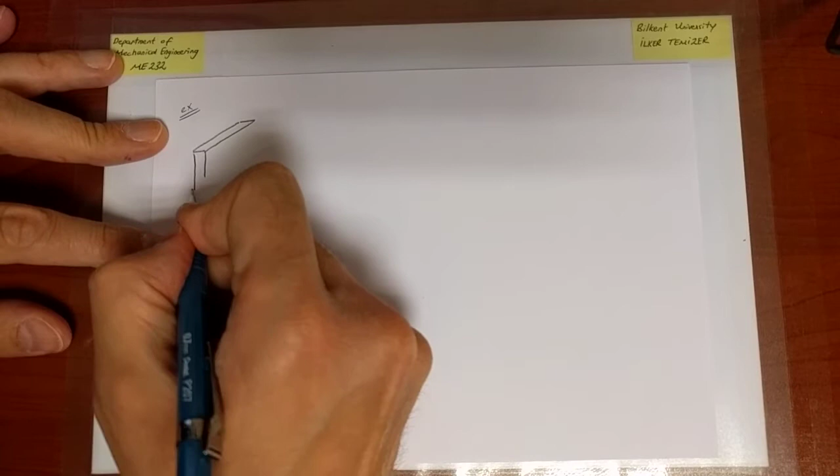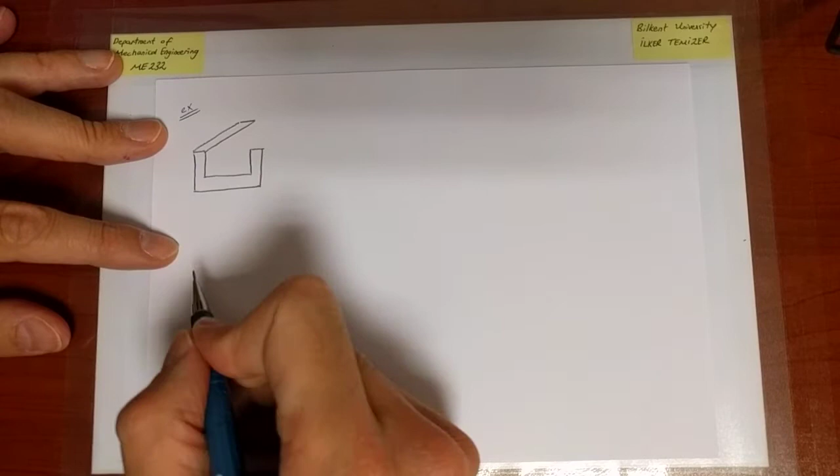So what I'm trying to do here is draw a block which will serve as a containment for the deformation of another material. So that's our block, okay? And within that block will rest yet another one. Like this, okay? All right, good.

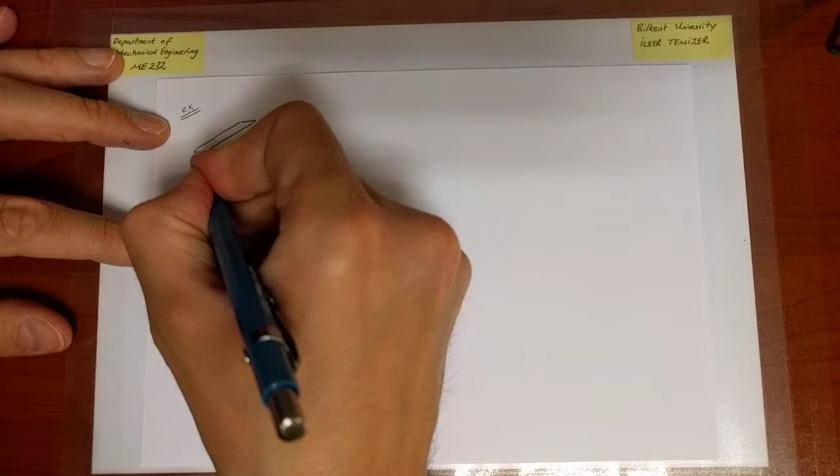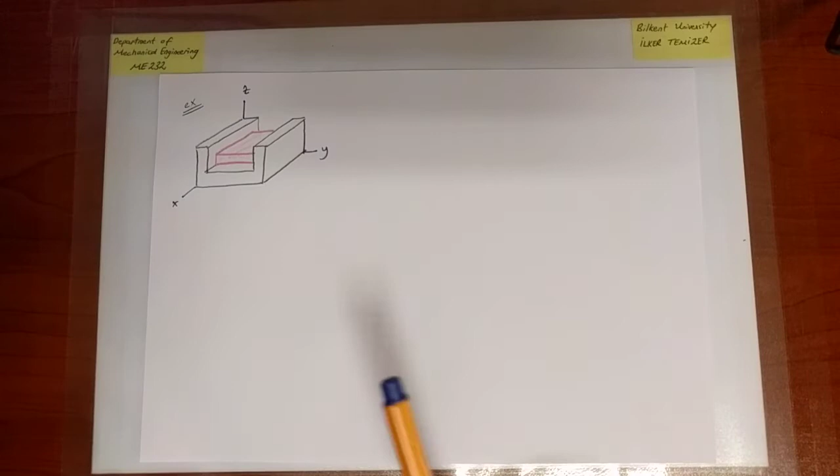So now, before I forget, let me also assign some coordinates here. This is x, that is y, and that is z. So I like to motivate this simple example first. And that motivation comes from a simple manufacturing operation associated with presses forming things out of sheet metal.

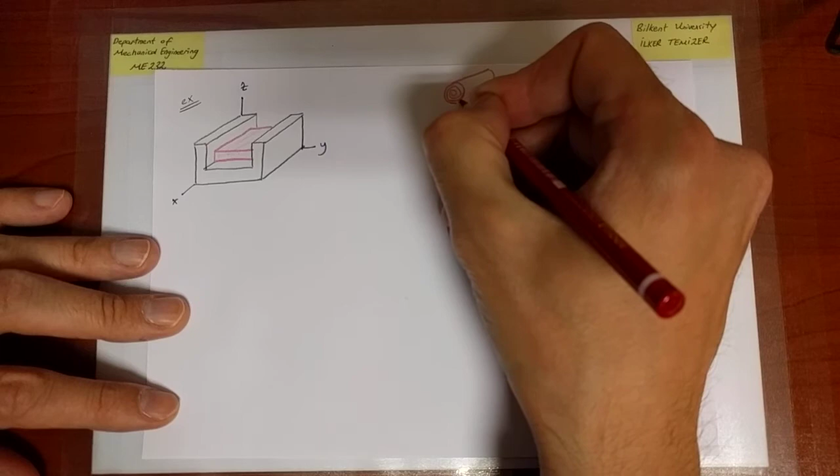So eventually when you do your training, you might see that into, say, a car factory gets delivered sheets of metal. These are pretty huge sheets. They're not small. They could have a diameter of 1 meter, and they could be more than 1 meter in length, several meters in length, and it's an aluminum sheet of a certain thickness, several millimeters. So you could unroll this sheet and from that extract a sheet of a certain thickness.

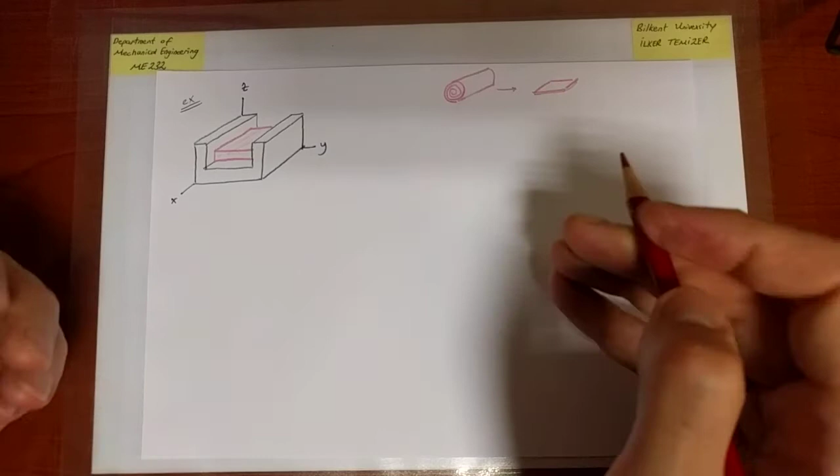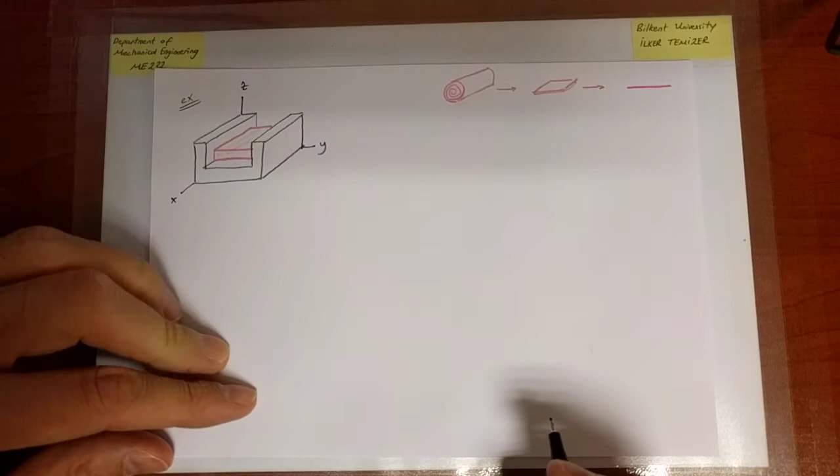Okay. And what you'd like to do now is take this sheet and form ultimately, say, the shape of a car door, from which you can do some more manufacturing operations and eventually manufacture the car door and use it in assembly. So we're going to take this sheet and form it into the shape of a car door. And the way to do that is to use a die that has the shape of a car door, or that shape is contained within the die. And this die will have a negative image located on a press. Okay, so that's also a part of your die.

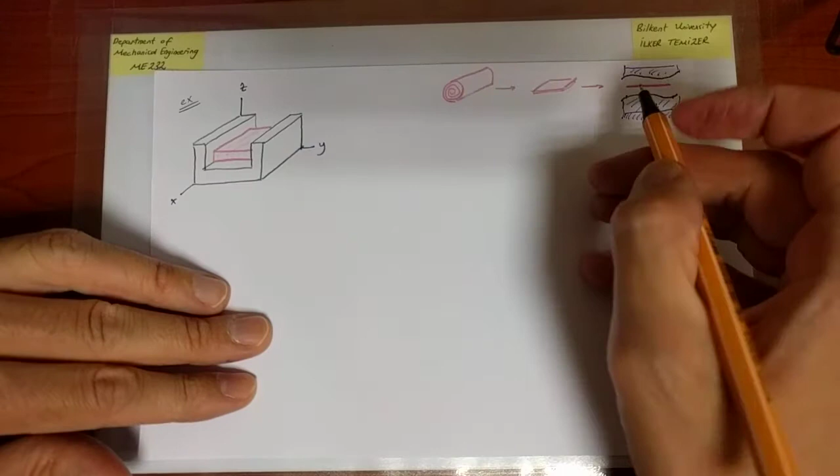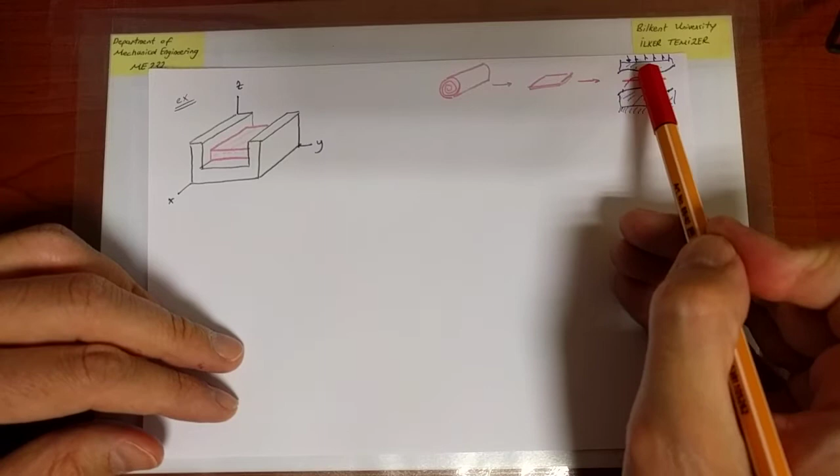And there is a huge press here because these are metals that are hard to shape. They require enormous forces. So this huge press will eventually take, so let's say the lower portion is fixed. The press will come and close up on the sheet of metal you have and apply a stress of certain magnitude, and eventually when the press closes and opens up, this initially flat sheet will have taken the shape of the car door according to the shape of the die. Okay, so we have a sheet metal and we apply compressive stresses on it, and eventually you have the portion of the car door forming.

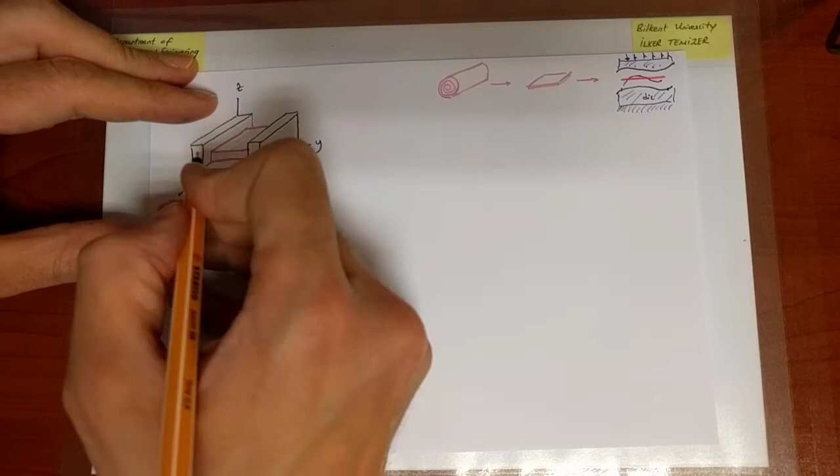Now in this process, obviously what we would like to have is the sheet metal deforming into the shape of the die surface and not the die becoming flat due to the pressure that is applied. So we don't want the die to deform, and you manufacture and design the die itself in that way. The whole process rests on that. So ultimately we're going to omit the deformations of the die because we're not interested in it and it shouldn't be significant. And so we will in fact idealize the die as being rigid.

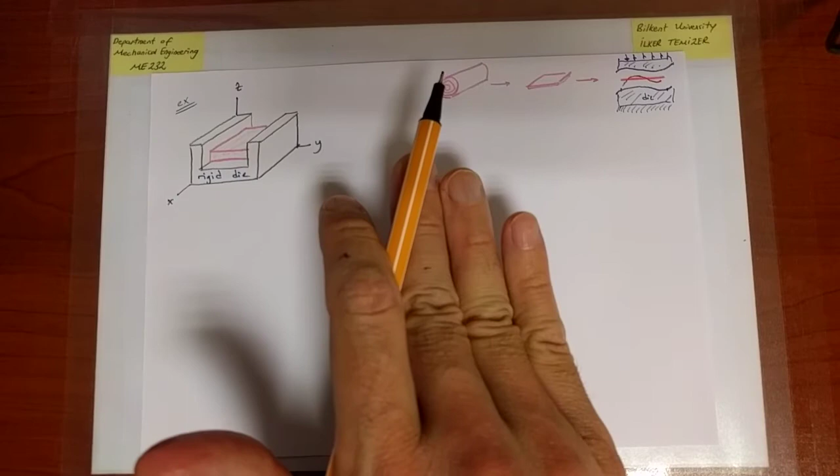So here this block is going to be like the die, and I have a red material like this sheet metal that I'm going to apply some compressive forces on and try to sort of form into a thinner sheet. Of course, this process is not governed by elasticity alone, because when you remove the die, the shape remains. Permanent deformations indicates it's not elastic, but here we're just interested in the initial elastic deformation phase of this process. If the forces are not that large, deformations initially certainly will be elastic. And our goal is to demonstrate the importance of using generalized Hooke's law.

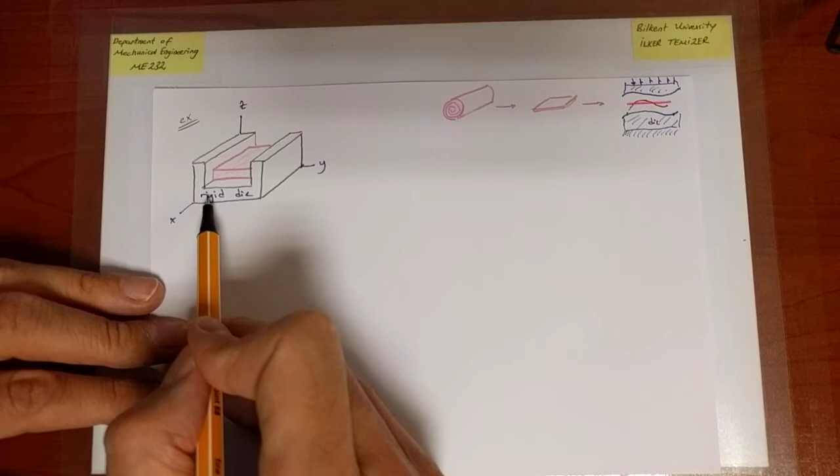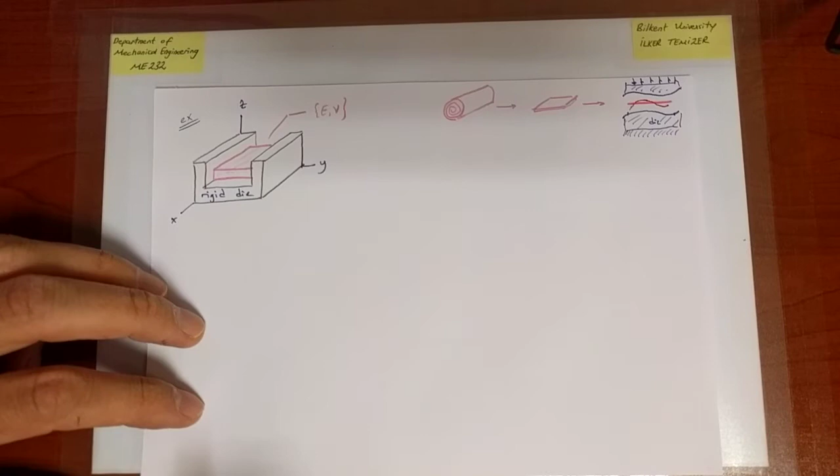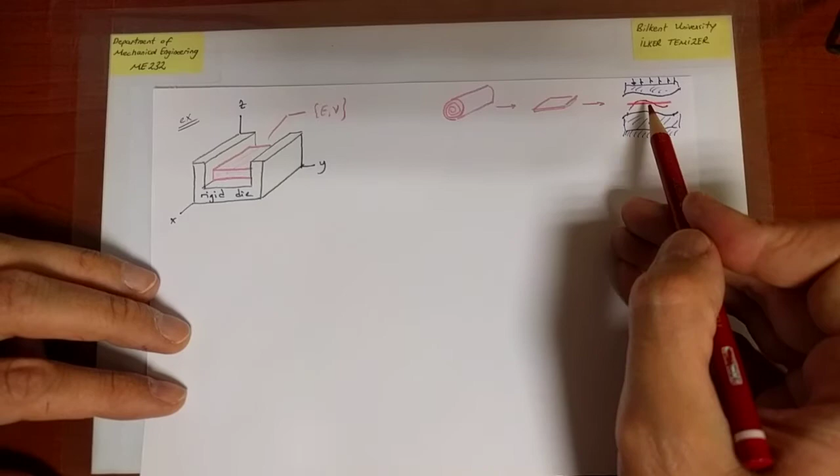So the die is idealized as being rigid. Nothing in reality is rigid, but the idealization just means that the deformations of the die are negligible in this analysis compared to the deformations of the sheet metal. And that's what the material is indicated as in this motivating example. The material properties are E and nu. I understand it to be isotropic. In reality, the die is lubricated with some surface agent or oil, so that eventually you ensure that the metal can spread on the surface easily, slide easily with little friction.

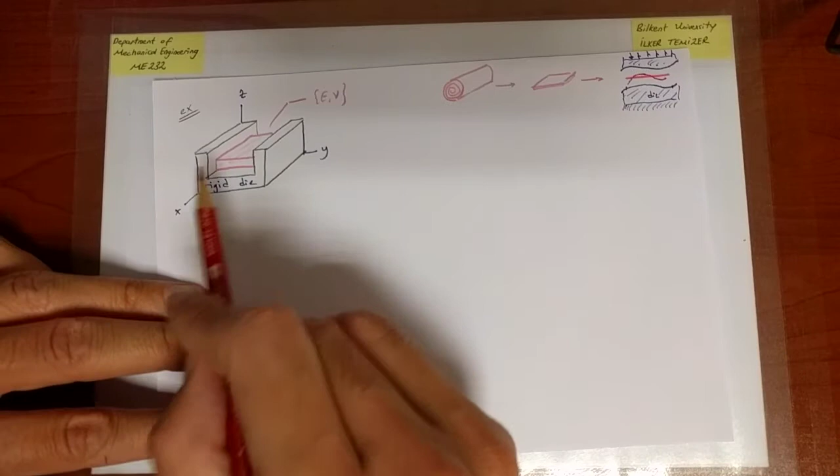And in this case, we're going to also assume that the surfaces are frictionless. Okay, one way or another, we obtain a frictionless surface. Now, friction for a given normal load with respect to the surface, normal load has to do with normal stresses. Friction has to do with the tangential direction. So if there is no friction, there is no tangential force.

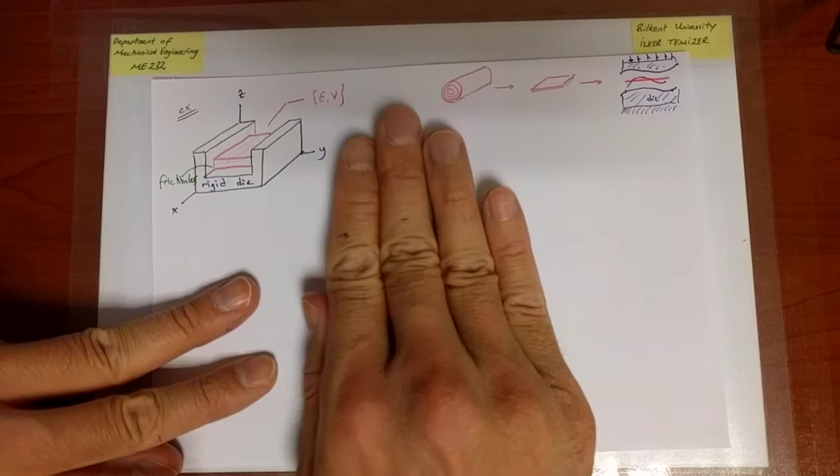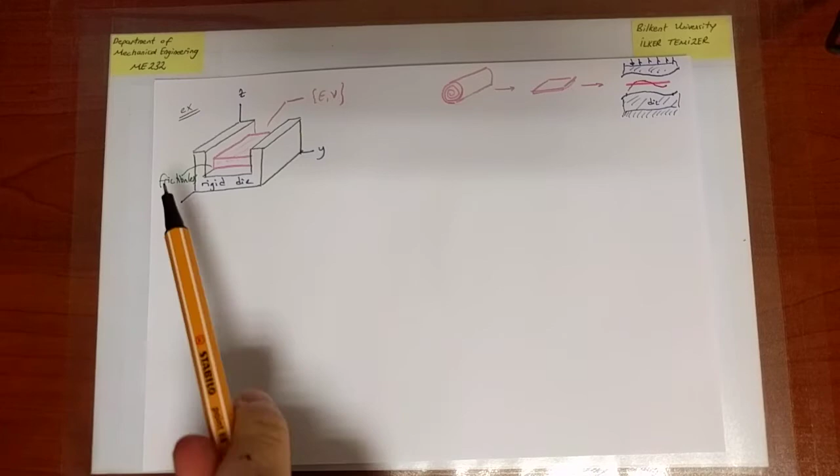If there is no tangential force, the normal force is there and hence normal stress. No tangential force means there is no shear stress. So frictionless assumption eventually will induce the outcome that there are no shear stresses in this example, hence there will be no shear strains. So that's our simple idealization. We're only concentrating on the normal components.

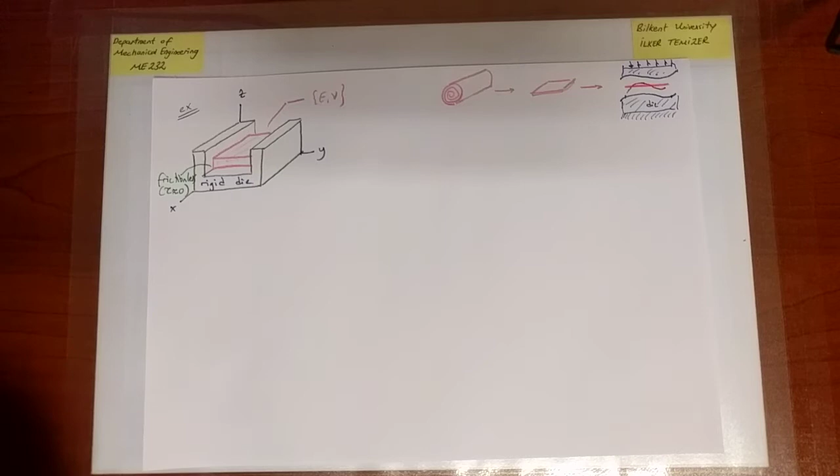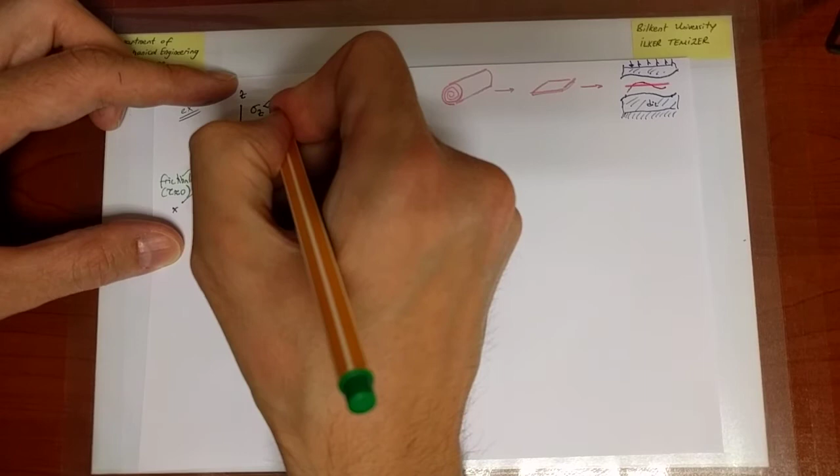And eventually, the type of loading we have is through a stress, sigma z. I both indicate the direction and I give the value as sigma z clearly because it's compressive. Sigma z has to be negative. The sign is important. It has to be embedded within sigma z. Okay, so we can say sigma z is a certain compressive stress of magnitude sigma naught, let's say. That's okay, but when I say it's sigma z, it has to be negative something. Okay, we understand that to be compressive.

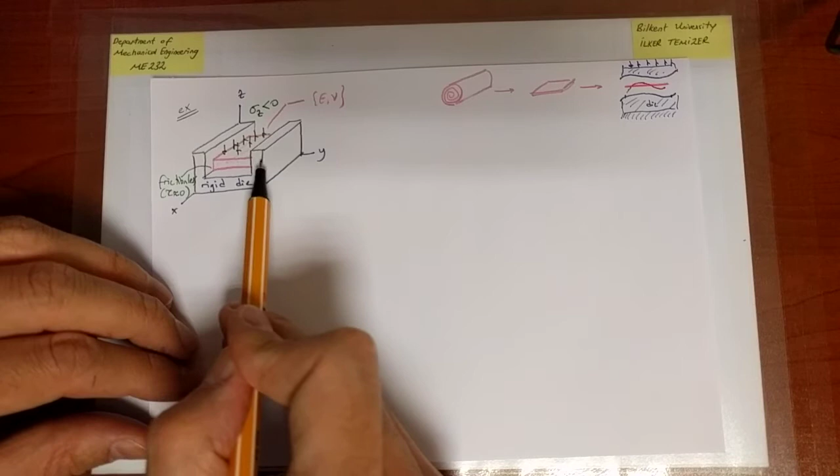And this is a rigid die. There is a material that fits tightly on the surfaces, and I compress from the top, and I'm gonna try to now determine the answer to the following questions. Question number 1. What is the stress in the y direction? B, what is the strain along the z direction? And C is a similar question. What is the strain along the x direction?

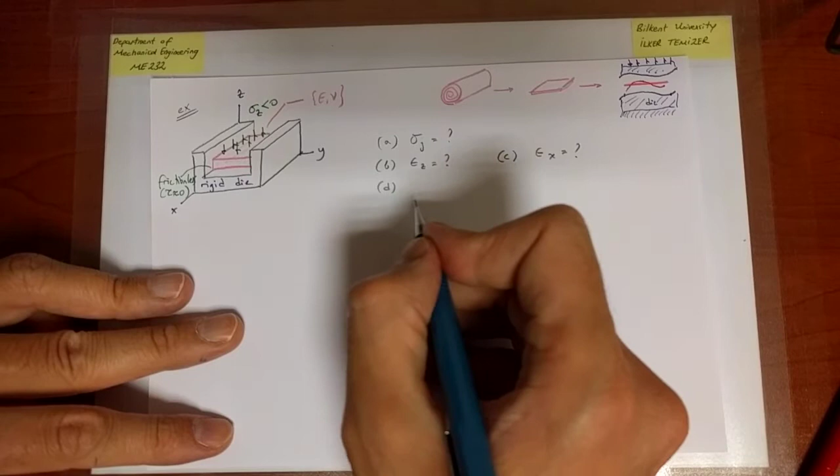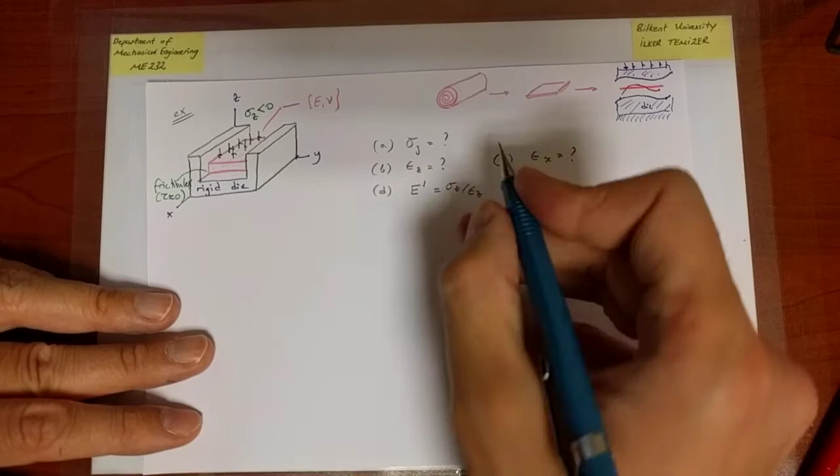And finally, D, let me first phrase it, and then eventually when we solve the problem, it will become more apparent. It asks for the ratio of sigma z over epsilon z. Now, normal stress over normal strain. Under normal circumstances, this would be the Young's modulus. But now we are considering generalized Hooke's law, going a step beyond uniaxial loading. We will have multi-axial states of loading, multiple normal stresses present at the same time. We'll have to use generalized Hooke's law, not the standard one, and therefore we're going to denote the ratio as E prime, which already indicates possibly that this is not going to be equal to E. That's why I'm indicating as such. Okay, so this is sometimes in words called the stiffness along the z direction.

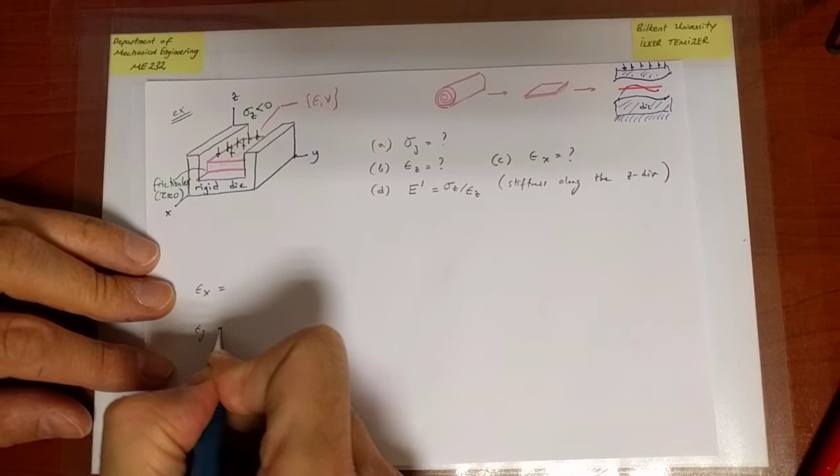Okay, now let's go ahead and proceed with the solution to this problem. And the solution ultimately will rest upon the generalized Hooke's law. And generalized Hooke's law is the first thing, therefore, that we need to write down. And we have to know this relation by heart. And it's really not hard to remember the relation at all. It's always 1 over Young's modulus. Remember the units. This is units of mega or gigapascals, Newton per meter squared in the end. And then that scales the stress of the same unit.

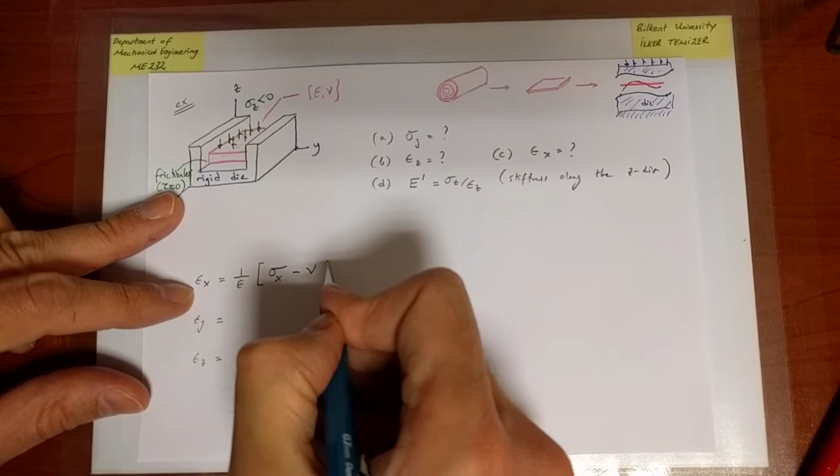And then epsilon x is 1 over E, stress in the corresponding direction minus nu, the Poisson effect in other words, composed of minus nu times sum of the stresses in the remaining two directions. That's a simple way to remember the normal stress-strain relation in the generalized Hooke's law. So it's 1 over E, stress in the corresponding direction y, minus nu, the sum of the stresses of the remaining two directions, x and z. And then epsilon z is 1 over E, sigma z, minus nu, sum of the stresses in the remaining two directions, sigma x plus sigma y.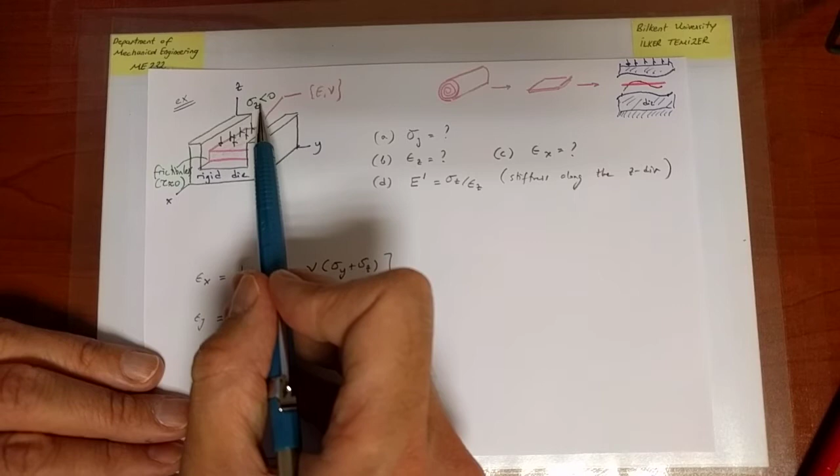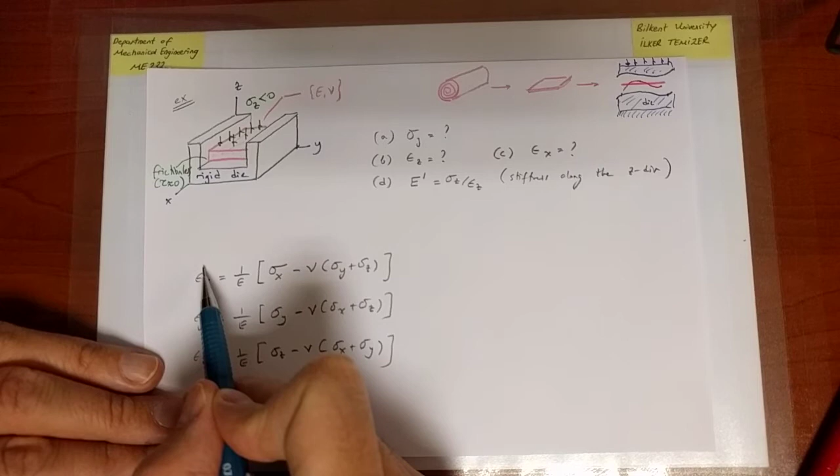Okay, so we've written our generalized Hooke's law, and now I'd like to go ahead and apply it. And the question is, well, find sigma y. Well, first of all, before that, let me ask you a simpler question that is easier to observe. Epsilon x, what is it? Well, I go ahead, I'll check epsilon x. I assume I know E, I assume I know nu, and I am given sigma z. It will have a negative value like minus 50 MPa. I know sigma z. Well, but what is sigma y and what is sigma x? Unless I know these two, I cannot determine epsilon x, right? And likewise, I cannot determine epsilon z, and so on. So it seems, first of all, I have three equations in terms of three unknowns.

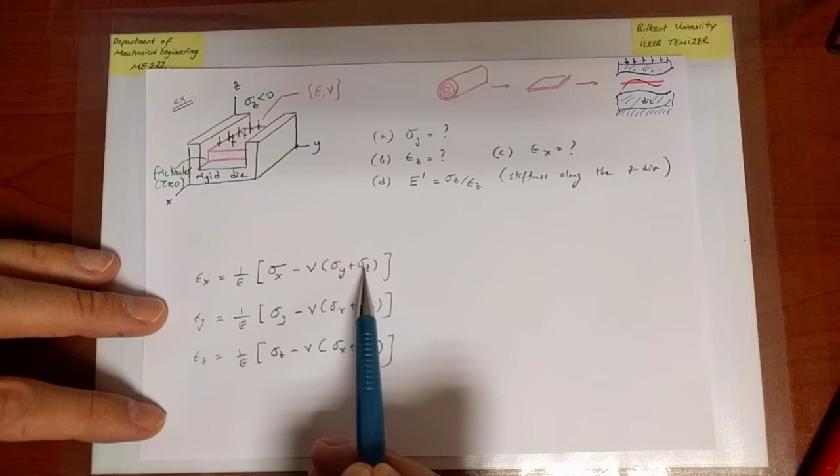So that's a well-defined set of equations. But I am only given one value explicitly, sigma z, for the right-hand side. And I need to know sigma x and y somehow to determine epsilon x, epsilon y, epsilon z, or I need to somehow have some balanced combination of three equations and three unknowns. Presently, I have only one known, sigma z. So here is where observations come into play.

In these types of problems, there isn't a single straightforward way to solve the problem, not always at least, but the observations should be stated, in my opinion, at the outset so that you can figure out the best way or best approach to the solution of the problem. So the first thing we can observe is the strain along the y direction.

The material is being compressed, and I am going to implicitly assume in my analysis that the Poisson ratio is greater than 0. But what if it's less than 0? Just for conceptual purpose, let's discuss that. But metals, sheet metals, are going to have a positive Poisson ratio. I know that from my knowledge of orders of magnitude. So let's say it's going to be 0.3.

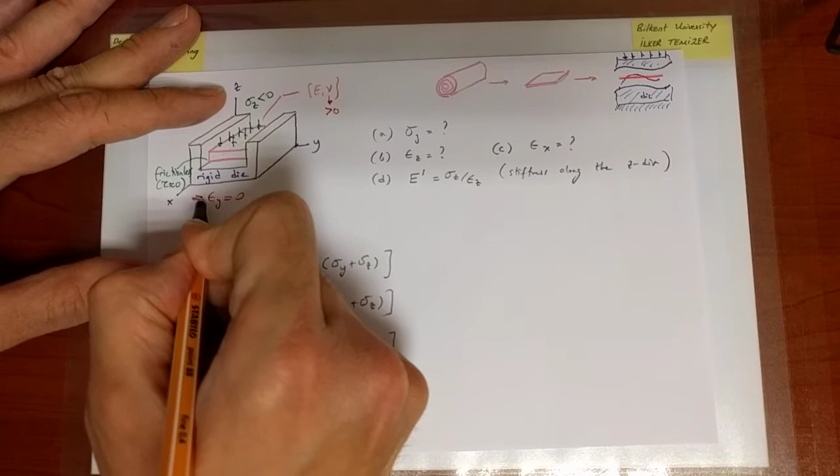So when I press from the top, this thing is going to try to expand in both directions. But it will not be able to expand along the y direction because it is restricted by rigid die surfaces along that direction. So there is no room for expansion, which means that epsilon y has to be equal to 0 from the outset. So that's my first observation. So I can immediately set epsilon y equals 0. Why? Because the die has rigid surfaces.

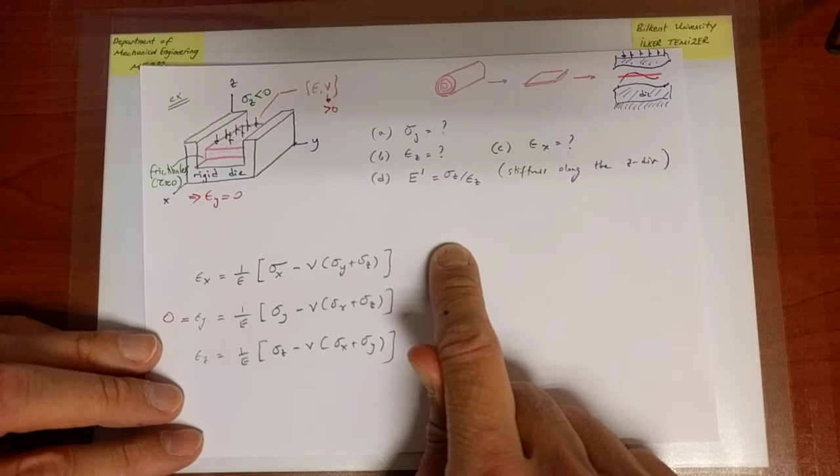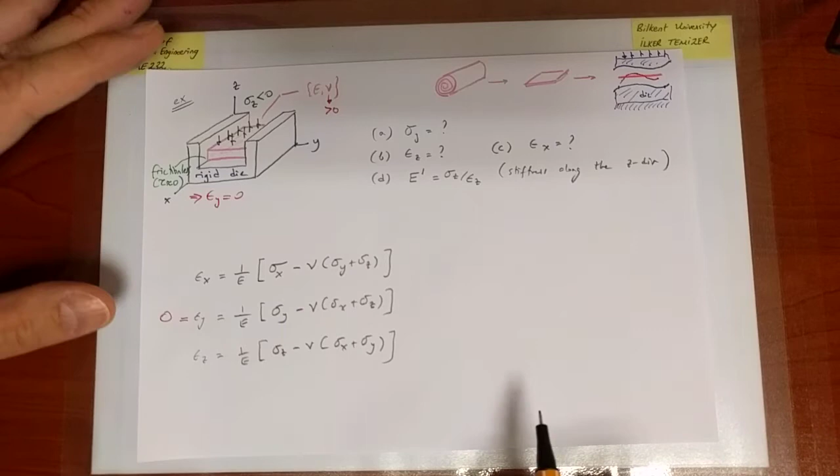Now then comes the following question. If I have a plane with normal, let's say in this case z, and I press on this surface, then I impose a force per unit area on the plane with normal z, so there will be a sigma z. But if I don't do anything, this surface is called a free surface. It's a concept that's going to pop up again and again. On a free surface, because I have no force, I have no stress, the normal stress will be 0. On a free surface, there is not going to be any frictional or shear stress either.

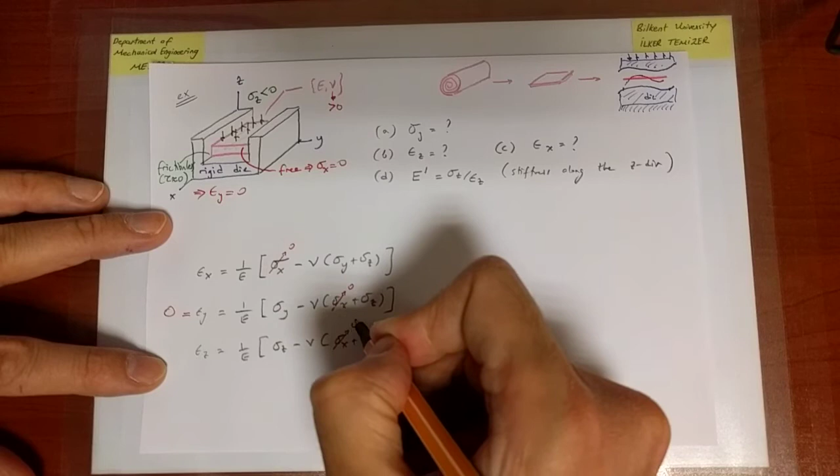But here I'm concentrating only on normal stresses, and I see that here I have a free surface. There is no constraint on that surface in terms of deformation. It can freely expand without any resistance, so it's a free surface. And because it's free, I understand immediately that the normal stress, sigma x, is equal to 0. So therefore, I know that sigma x is going to be 0 in all of the relations that I have written here. So that goes out of the picture.

So all of a sudden, I am left with a setup where I had three equations for three unknowns. And in fact, let's go back and count once again. I have three equations, but I had in general 6 unknowns, 3 strains and 3 stresses. So 6 unknowns, 3 equations, and now I have additional information on the unknowns. So first of all, sigma z is also given. That's a given of the problem.

One more equation. Sigma x is now observed, another equation, and epsilon y is also observed to be 0, another equation. So 3 strains, 3 stresses, so 6 unknowns, 3 equations from material behavior, isotropic linear elasticity, generalized Hooke's law, and 3 more inputs, one of which is already given, the other 2 I observe. So now it becomes a well-defined system of equations, and I can go ahead and solve immediately.

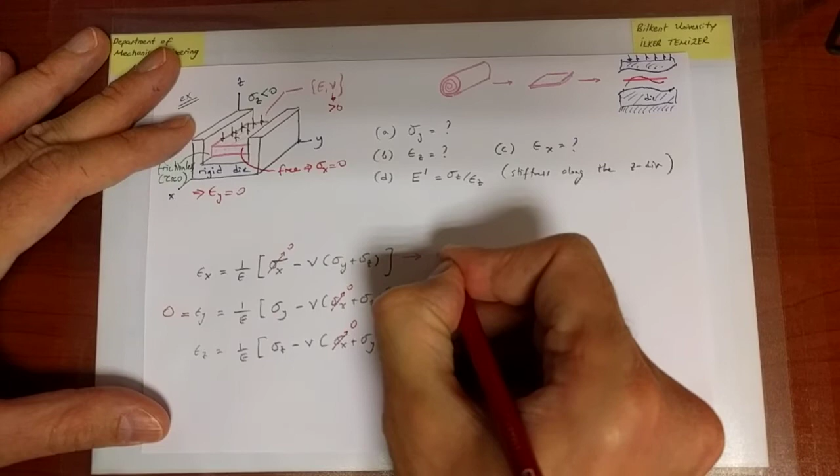Now, the first thing I can do is go ahead with part A. And part A solution is going to come from here. Part A asks us, what is the value of sigma y? Let me quickly rephrase that. Part A answer is going to come from this equality, and it asks, what is sigma y? Well, epsilon y is 0, multiply both sides, it's irrelevant. So sigma y is going to be nu times sigma z.

Then part B is going to come from this equality. It's asking us what is epsilon z. Well, epsilon z is equal to 1 over E times sigma z minus nu sigma y, which is nu sigma z. So it's equal to (1 minus nu squared) over E times sigma z.

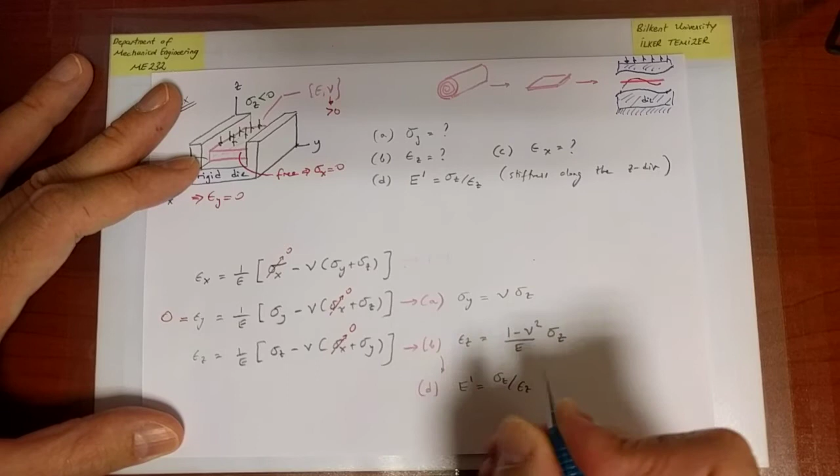Okay, and then I can immediately go to part D and skip C for a second. I can go to part D and calculate the ratio of sigma z to epsilon z, which we are calling E prime, and it's equal to E over 1 minus nu squared. I'm going to interpret all of these results in a second.

And finally, we can go to the very first one, which is going to give us the answer for part C. We're trying to determine epsilon x, which is evidently equal to 1 over E times minus nu sigma y plus sigma z, and sigma y is nu sigma z. So we have epsilon x equal to minus nu times 1 plus nu over E sigma z. Okay, great. So these are the results.

Now in these types of problems, either numerically or conceptually like this, it is actually rather easy to make mistakes. So I think it's always useful to step back and think about whether our results are meaningful or not. This is a habit we should build in mechanics all the time, and for that matter, in any analysis in mechanical engineering. So here, first we should think about whether the results make sense or not.

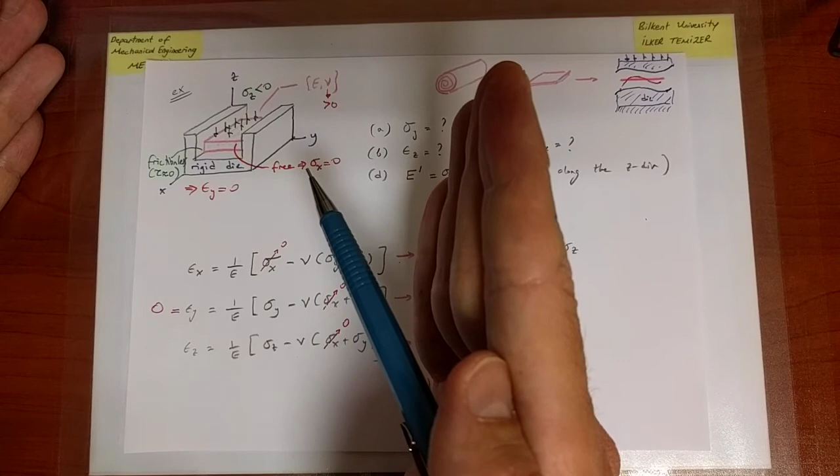We are applying a stress along the z direction, and it is compressive. As a result of that, the material tries to expand along the y direction, but it cannot. So there are restrictive stresses on the vertical walls, which cause sigma y to build up. Therefore, should the value of sigma y be positive or negative? In other words, should it be tensile or compressive? The answer is that it should be compressive. So sigma y should have a negative value because the stress component, when I indicate it explicitly with directional indices, has to incorporate the correct sign.

Nu, given my discussion and the fact that I'm assuming expansion, is assumed to be positive, sigma z is negative, and hence sigma y is negative. So I can put a conceptual check on that. Now, my conceptual check doesn't mean that the calculations have been carried out correctly, but at least I don't seem to have an outstanding mistake at first sight. Then I can think about the value of the strain along the x direction. Well, I'm pushing, the material tries to expand, and it's free to expand along the x direction, so I expect a positive strain. Do I have a positive strain? Positive, positive, positive values. A negative together with a negative makes positive, so I have a conceptual check there as well.

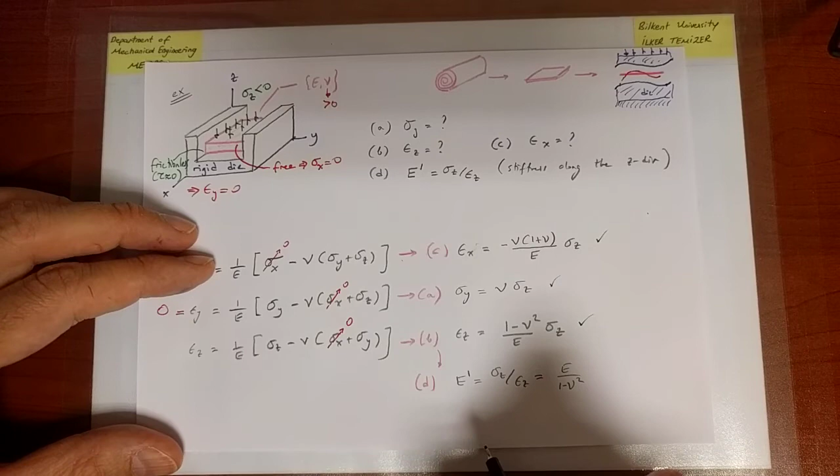And then epsilon z, well, I'm compressing along that direction. I expect epsilon z to be negative. It's going to get shorter along that direction. Negative, this is positive. How do I know that? Because nu is less than 0.5, and therefore this whole thing is also negative. It checks.

Now, finally, this is an interesting outcome. At the beginning of the course, if I had asked you that question, what's the ratio, you would probably say that's equal to the Young's modulus. But now we see that as a result of the multiaxial state of stress, we have the ratio coming out to be not E, but E over 1 minus nu squared. And I know that this is a quantity that's larger than E because nu is less than 0.5. Now, how large is it? Let's say nu is 0.3. 0.3 squared is 0.09, so it's of the order of 0.1. So this is 0.9. E over 0.9 is roughly 1.1 E. So it's not a huge difference, but for sure it is larger than E.

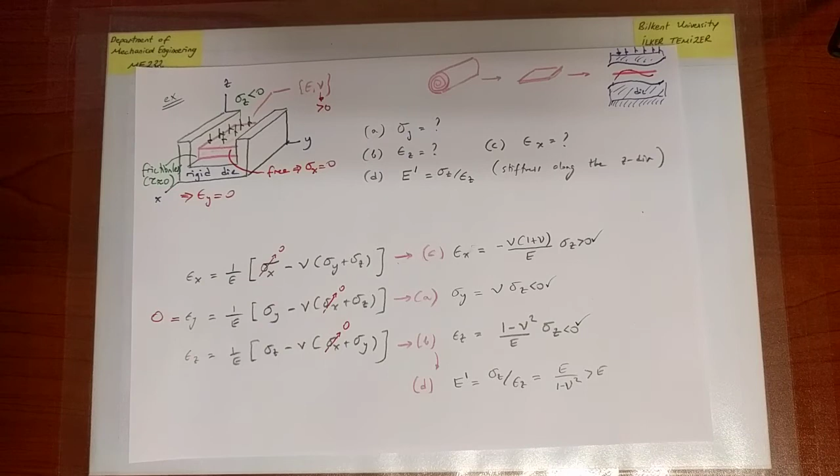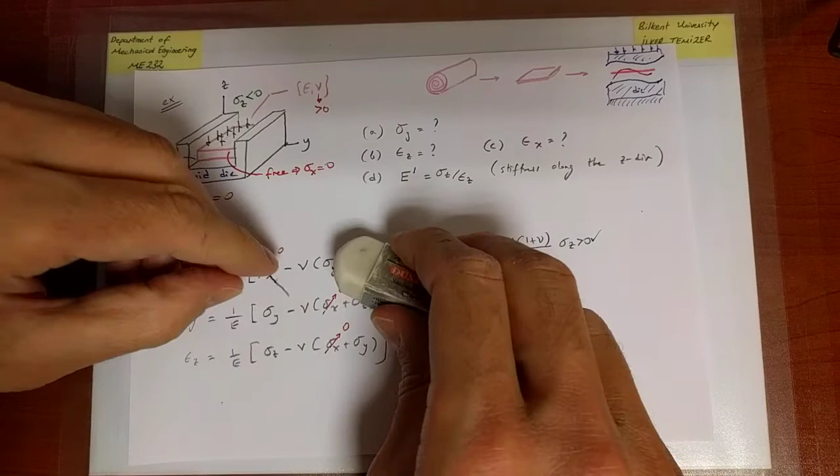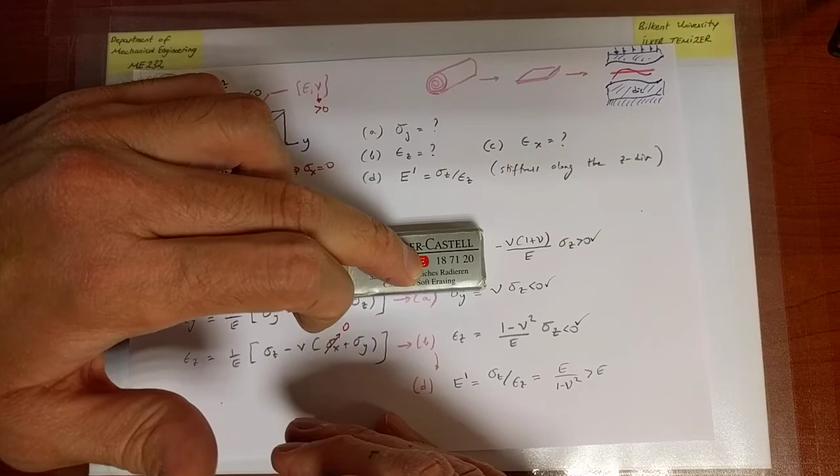Okay, so this is larger than E. We said that this is less than 0, this is less than 0, and this is greater than 0, which are our conceptual checks. Does that make sense? It does, because you have a block of material. Suppose there was no rigid block constraining the motion of this material. If I press on it, it expands in all directions with some degree of freedom. And the ratio of sigma z to epsilon z along that direction is a measure of that degree of freedom.

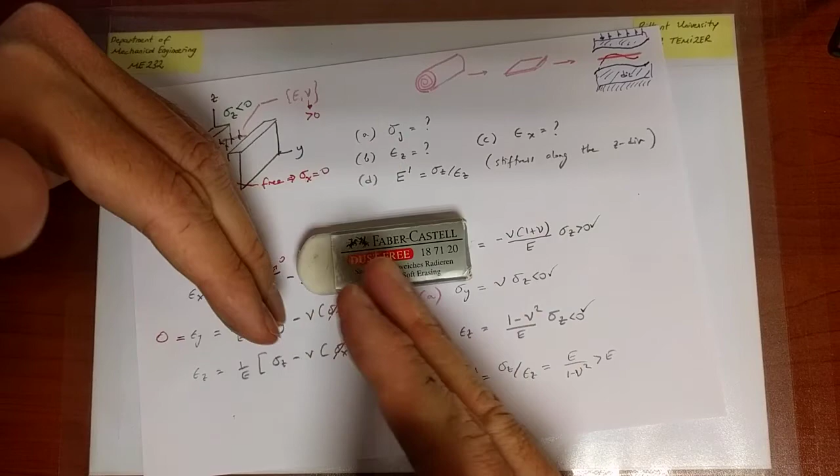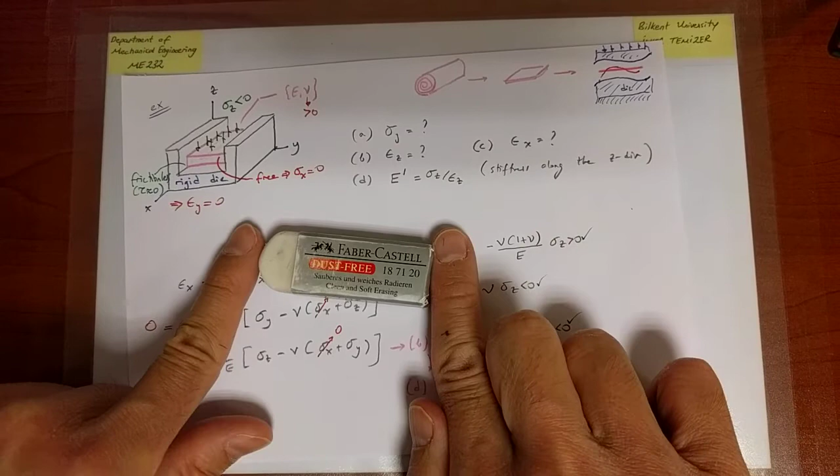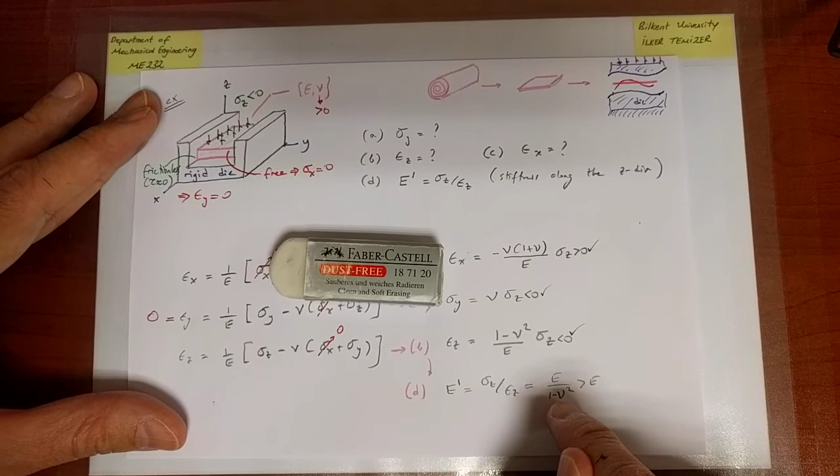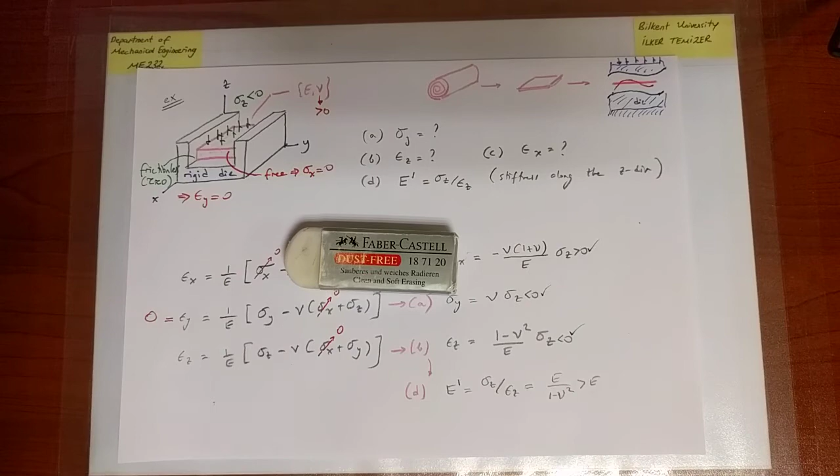But now if I constrain it in one direction and I push again, then I am restricting the ease with which it deforms along at least one direction. I'm restricting it along the y direction in this case. It cannot move along the y direction, and therefore a restricted degree of freedom is observed. And when you restrict something, you increase, if you like, its stiffness, and that's what's happening here. The stiffness with respect to deformation along that direction increases as a result of restrictions along other directions on the block. So here I'm restricting deformation only along y.

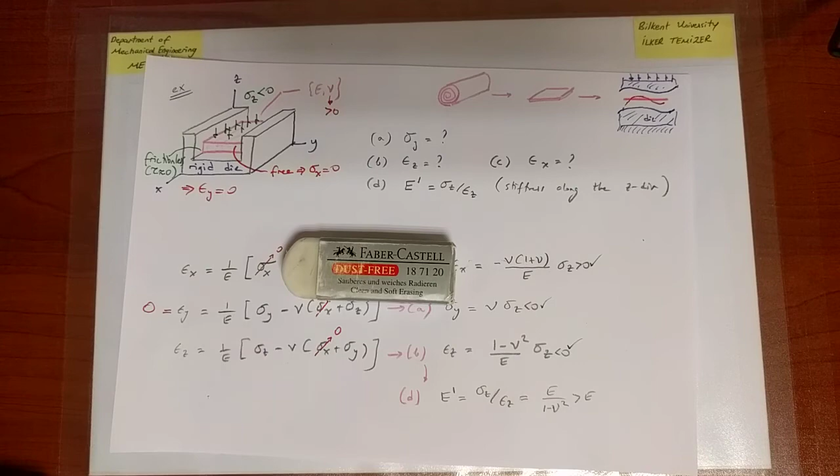If I had additionally restricted along the x direction as well, then you could estimate that the stiffness would increase even further than this value. And that's what eventually happens. You may want to go ahead and calculate that quantity. So all of these results seem to make sense to me, so I'll put a check here as well. Again, that doesn't mean that my results are correct. In this case they are, of course, but the conceptual checks just check the central facts without the quantitative aspects.

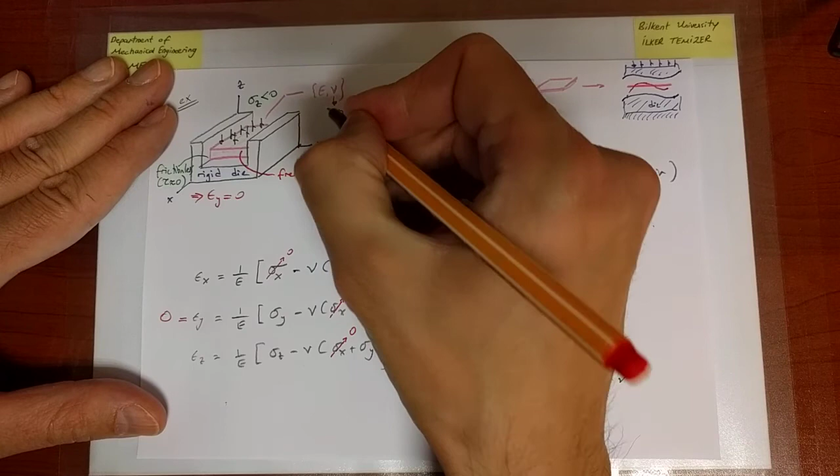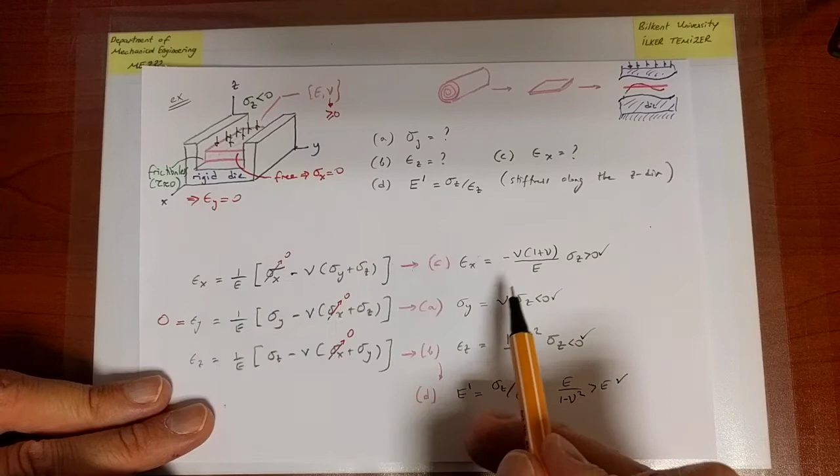So finally, let me ask you an additional question. What happens if nu is less than 0, or if it's equal to 0? Now, if nu is less than or equal to 0, some things do change and some things don't. First of all, the relations as I have written them don't really care whether nu is greater than 0 or less than 0. If nu is equal to 0, sigma y is 0, because the material will not expand along the transverse directions, since nu is minus the transverse over longitudinal strain. So there is no expansion, and I don't expect stress to build up along the y direction. So if nu is 0, sigma y would be equal to 0.

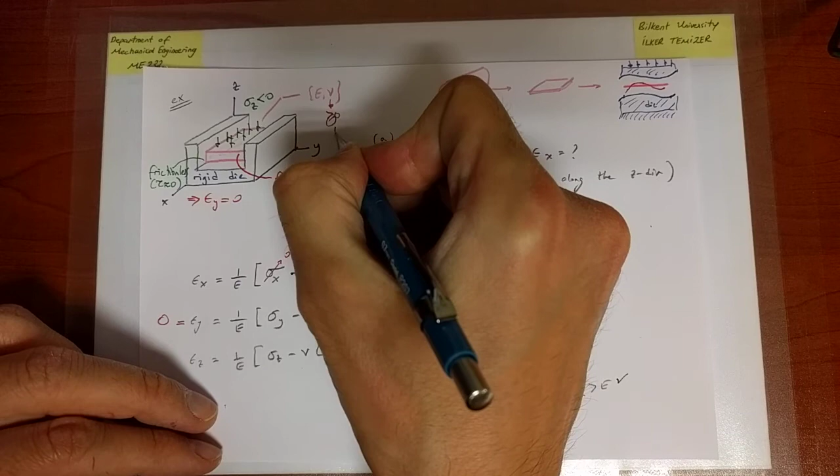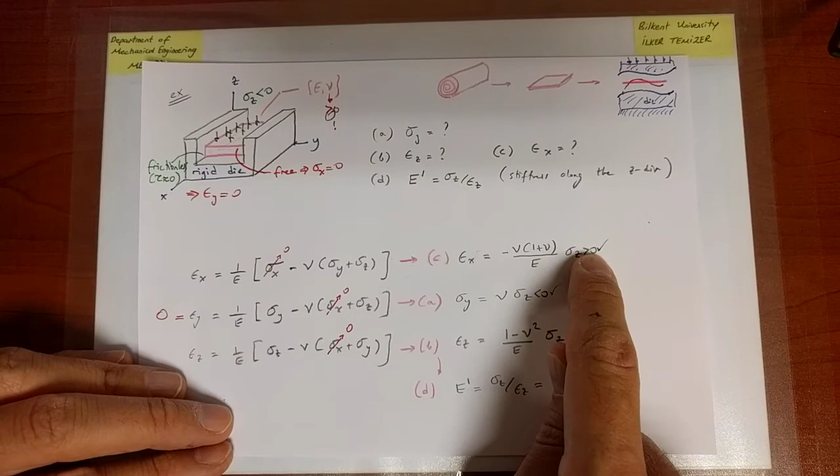This part I have written after our analysis, so here I'm not going to put any inequality sign. If nu is equal to 0, I would not expect an epsilon x either, because the material is not displaying any transverse strain expansion, and indeed epsilon x will come out to be 0 in that case. Again, I'm not putting any inequality sign. So this is still correct, and similarly, this would be correct. In that case, epsilon z would be sigma z over E, and E prime would be exactly equal to E. Does that make sense? Yes, because if nu is equal to 0, this part is omitted and epsilon z is sigma z over E. So we're back to the standard setting as if it's uniaxial, and indeed it's uniaxial because there are no other forces building up.

But what if nu is less than 0? What happens in that case? Now I have to change my observations. First, you should recognize that the generalized Hooke's law is valid for any isotropic linear elastic material behavior, and nu can therefore take values all the way between -1 and 0.5. So the relations themselves are always valid, but what will change is the observations. When nu is negative, when I press, the material will try to contract. As a result, it will free itself of contact with the vertical faces that have to do with the y direction. In other words, it will free itself, meaning sigma y would be 0.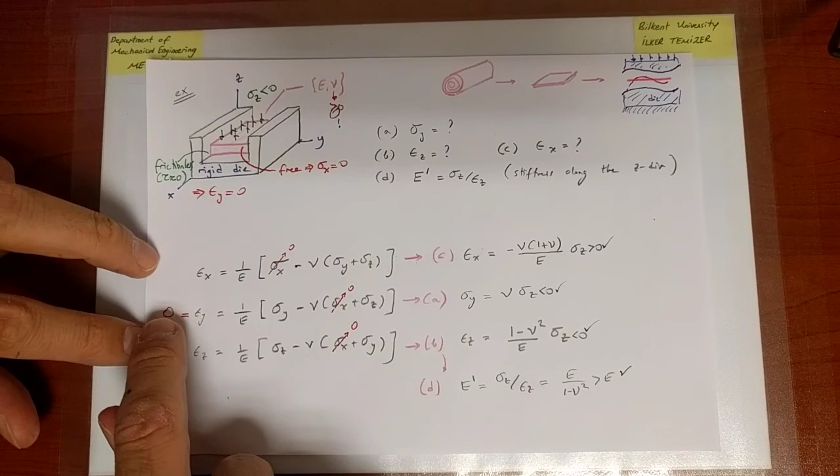Consequently, because I know sigma y is equal to 0, instead of setting epsilon y equal to 0, I would set sigma y equal to 0. So I switch this 0 observation from epsilon y to sigma y, and conceptually I will then still be able to solve these equations for the unknowns that I am trying to determine. So whether nu is negative or positive simply shifts this observation of 0 from the strain to the stress along the y direction, and all the steps are still dictated by the generalized Hooke's law.